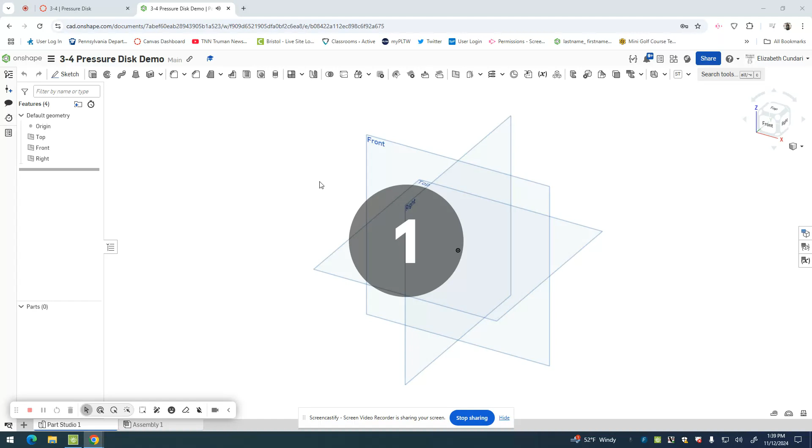Alright, so this is the first time in this class we're going to do this, and they're being kind of loud, so we will see how this goes.

Alright, so we're going to use the side disk here and do this dimension, and then revolve it to create this. So, we need to do some dimensions.

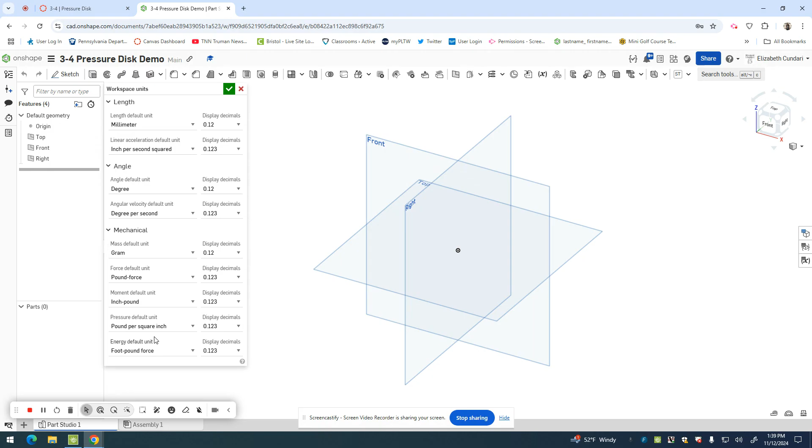First we have to know what we're in. So millimeter, degree, gram, 2 decimal precision. Go up here, workspace units, millimeter, 2. Look at me, already in my 2s. Degree, gram, 2 decimal precision. All right, I'm good to go.

I'm going to sketch on the front plane, change it to my view cube, and then go ahead and create like this shape.

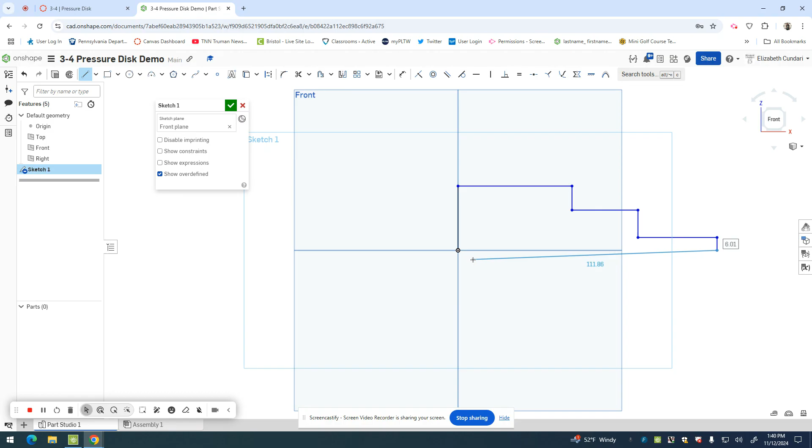So I'm making sure that everything is straight. Straight, straight, straight, straight, and vertical, vertical, vertical, vertical, vertical. Then I'm going to look back at some of these dimensions. I'm going to put a dashed line or a construction line going right here. Okay, I like that.

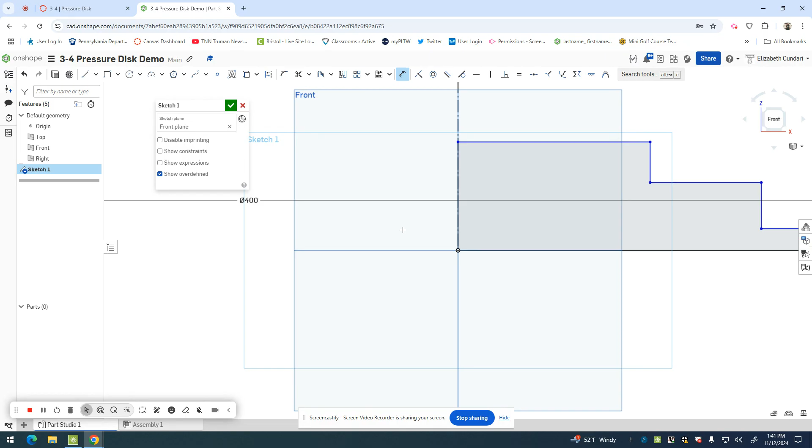So now if I look at this, I know that the whole diameter of the whole thing is 400. And so I'm going to do this dimension. Here to the dashed line to over here, bop it to the left, 400. Crazy, right? Remember how we did this with that other assignment? That's what we're doing.

And then I'm going to go ahead, it says it's 330, so I'm going to go right, middle, bop to the left, 330.

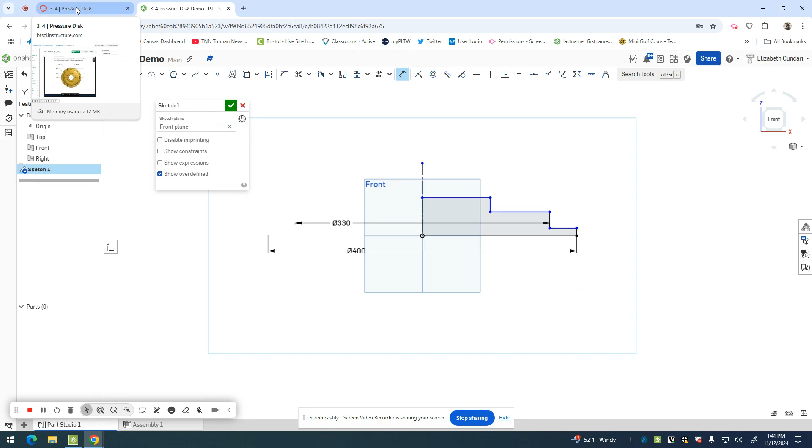What's next? This one up here, 170. So from here to here, over here, 170.

Oh, and you know what, there is a line, like there's a hole, so I'm going to take a vertical line and go straight down here. And again, I'm going to make sure that it connects, connect, connect, and then I'm going to do vertical constraint.

So then I can go ahead and do, what was the dimension of the hole? 100. So here to here, pop it over, 100.

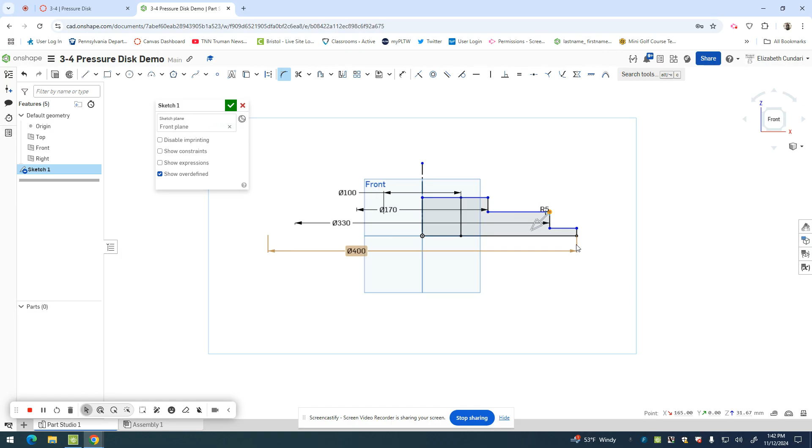Ooh, okay, cool. The only other thing is this is also filleted, so let's look and see what that fillet is. 30. So we can look at our side part now. So we know this corner right here is going to be 30. Whoa. And then we need some heights.

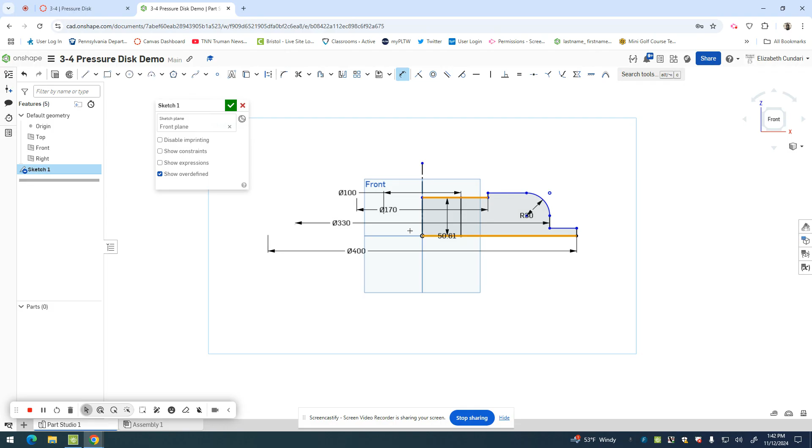So if I put in the heights, it's going to fix what I got going on here. So we have 10, the whole thing is 75. So let's do that first. Dimension, here to here, 75.

And then what was that bottom one? 10? And the top one's 15. So from here to here, 10, and from here to here is 15, and everything's solid.

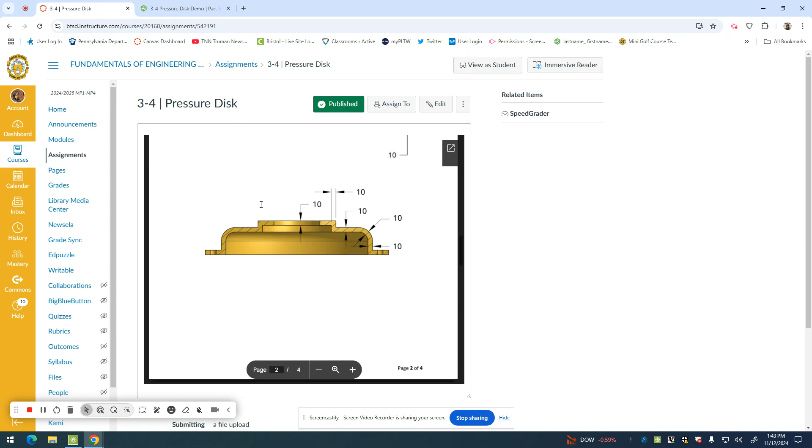Is there anything else weird? I feel like that's it, right? The only other weird thing is they did shell it. When did they shell it? Did they shell it before? Okay, let's try it now, and then we'll see if we have to shell it later.

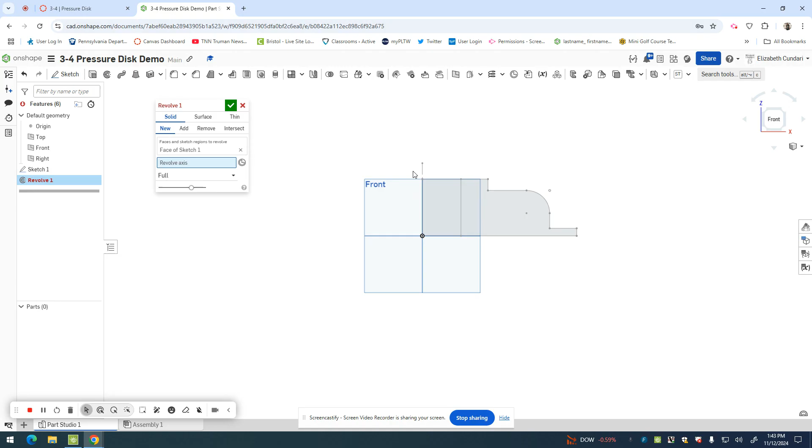I'm wondering about this hole on the top, if I shouldn't have it. Okay, I'm going to hit check. I'm going to revolve what I made. I'm going to use the axis, that dashed line. And there you go.

Cool, right? But this is the thing, they shelled it. I know, you're like, how did I just do all that? Well, that's why I wanted to show you this so I could. But the shell is what, 10? See what happens if I make this 10. See, the hole is in the middle. I don't like that. We have a problem, guys.

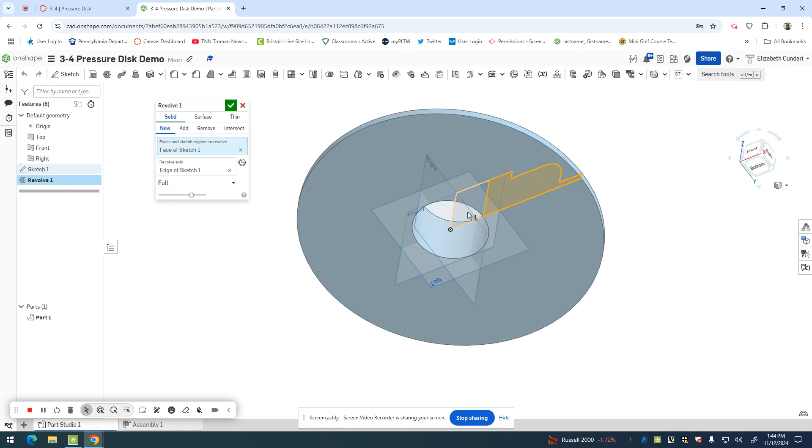Okay, I'm going to do this. On my revolve, I'm going to add this. Then I'm going to shell it. Where is shell? Here, make it 10. And then I can just cut that circle out on the top.

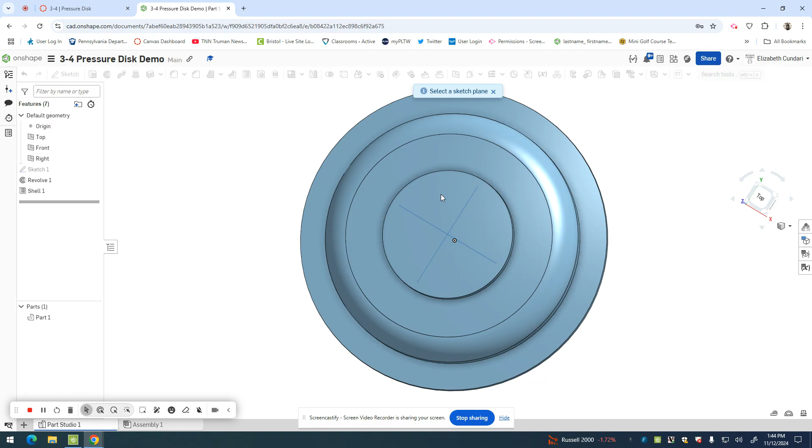So I'm going to sketch, do this, top view. And then what was the circle again? Does anybody remember? 100. I got a lot of people in here trying to sort it out. Let's see how this goes.

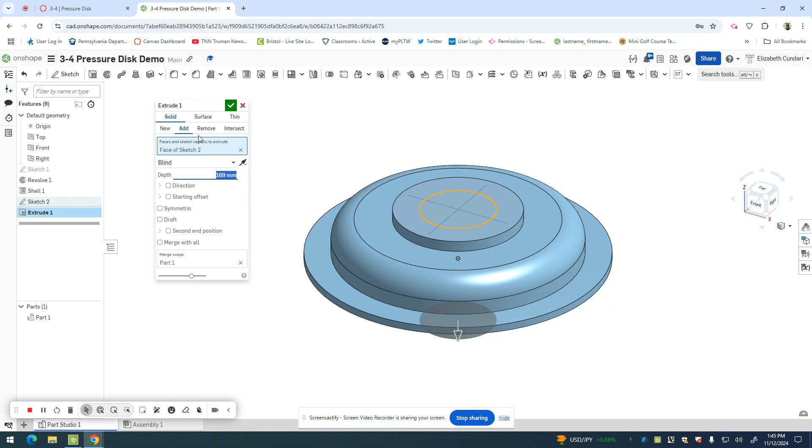And then I'm going to go ahead and extrude, remove that little bit. And then that way it's not cutting that hole the way we had it. See how that looks just like what they had? I'm going to turn these off because they're starting to get annoying.

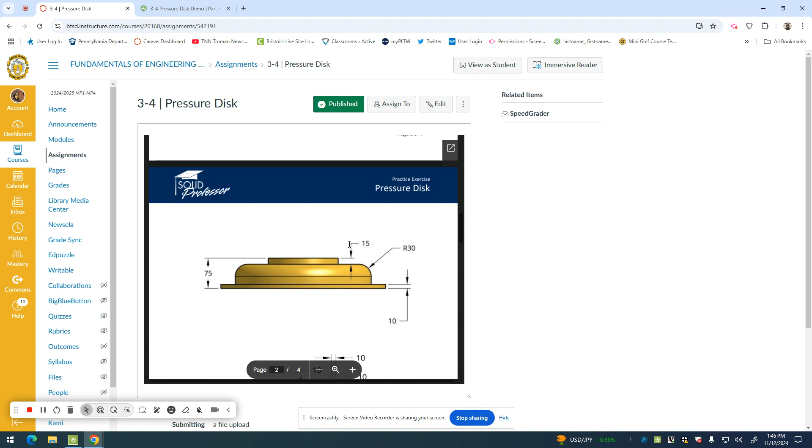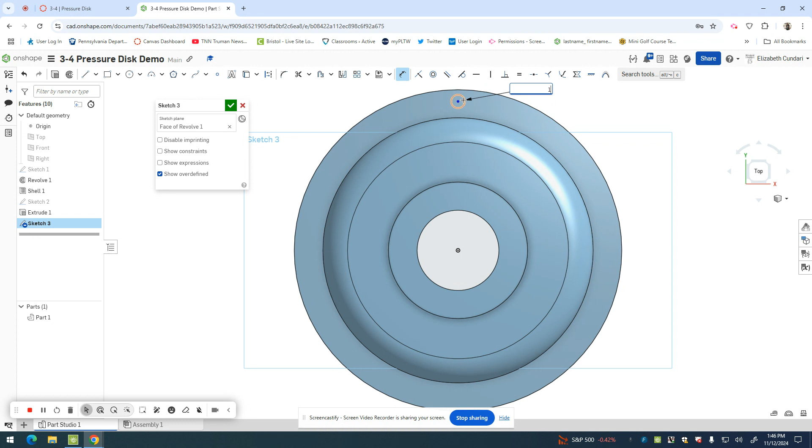So let's put that in, top, sketch on this. I'm going to go in the middle, I'm going to turn my origin back on just so I can find it. Go straight up. And then what was the distance? 182? Was that it? 182, 12. Nice, hit check, extrude, remove that little one.

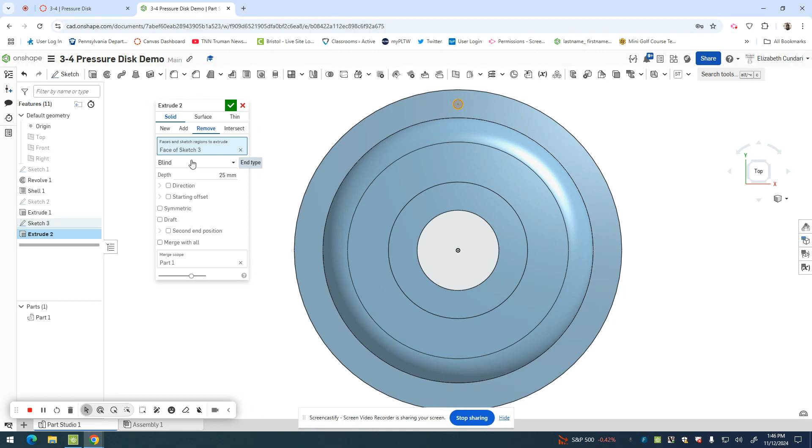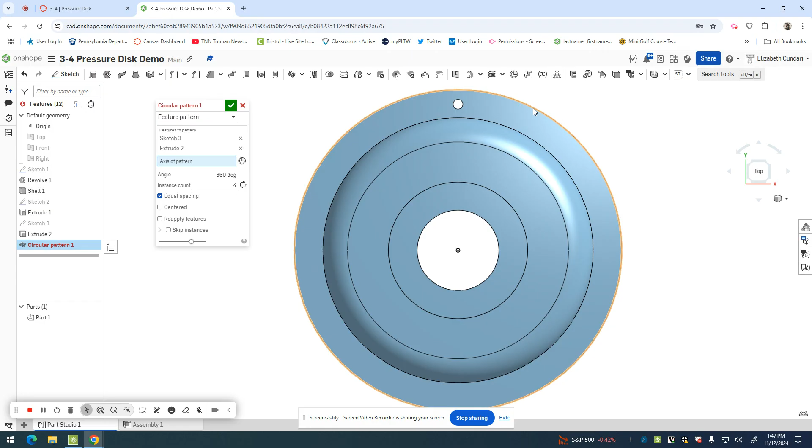And then we're going to pat circular pattern, feature. And you can pick for the axis any circle and it'll work. So like out here, make it 16. Oops, that's 15, 16. That's it, that's the whole thing from beginning to end.

Okay, so the only other thing I have to do is give it a material. It should be brass. So I'm going to go here, assign material, type brass, hit OK, go like this.

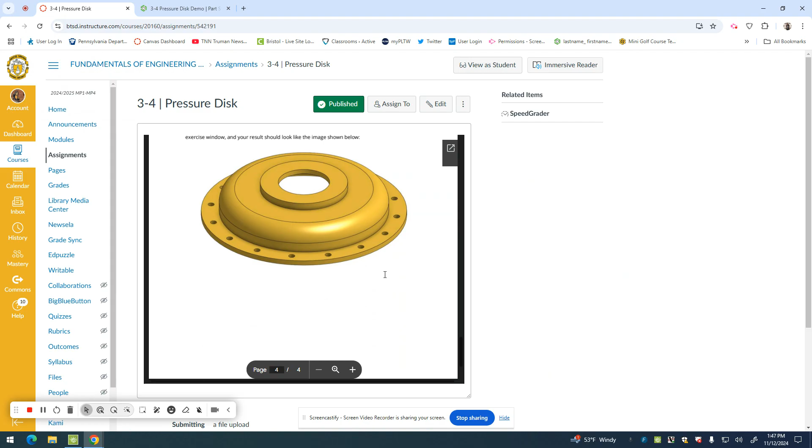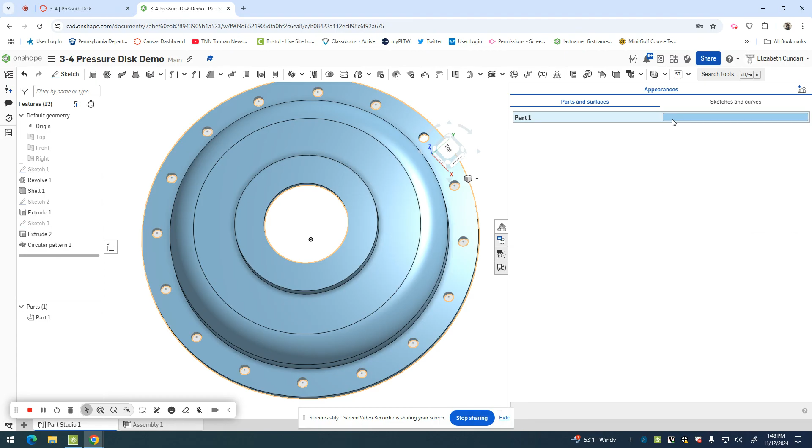So the last thing I would like you to do is you can change the color. So let's go over here, click on this, make it a brass color.